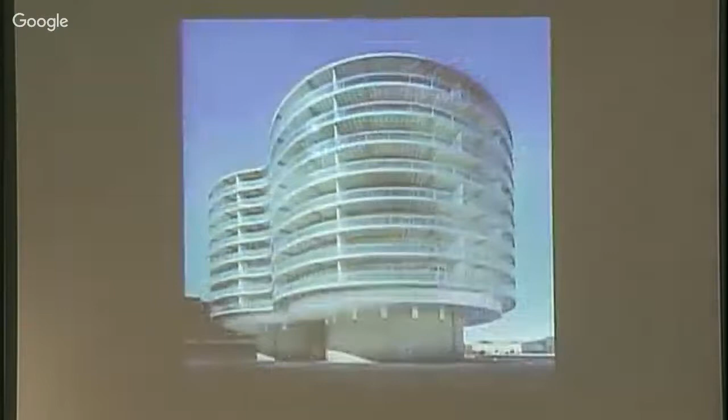In Madrid, we built this social housing project. Again, density with a big public space. And you see, we try these things more often in all kinds of places. But sometimes we also built single family houses.

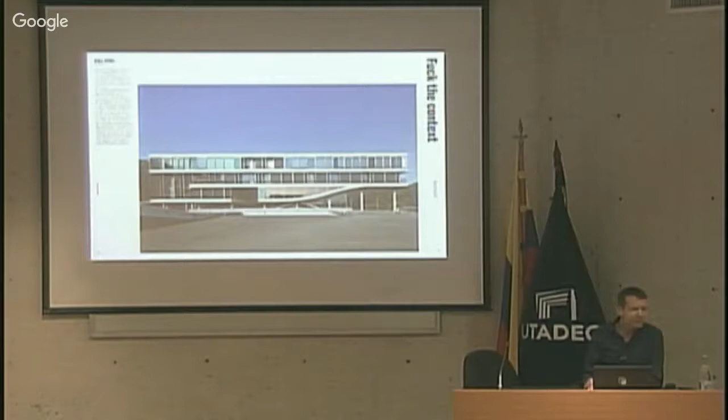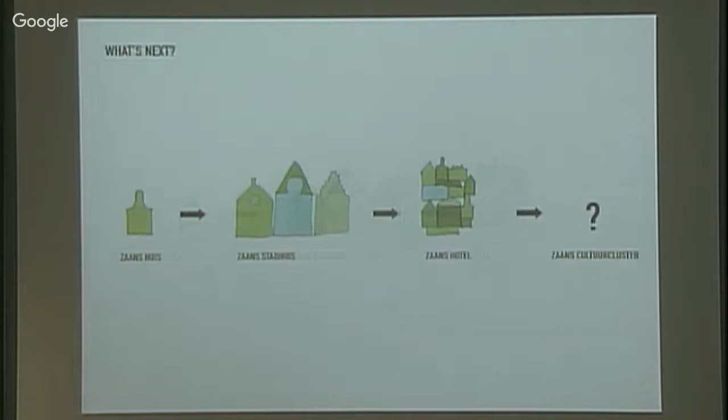To make it even more complex, they wanted to get these 8 cultural centers out of their houses and into this new culture cluster. None of them wanted to go, so we were designing a building for people that didn't want to use it. Also kind of tough. So we thought we should put them all together under one roof, but they should all keep their own identity. How do you do that? And then on top of that, if we wanted to win this competition, we actually had to deal with this Zaans house.

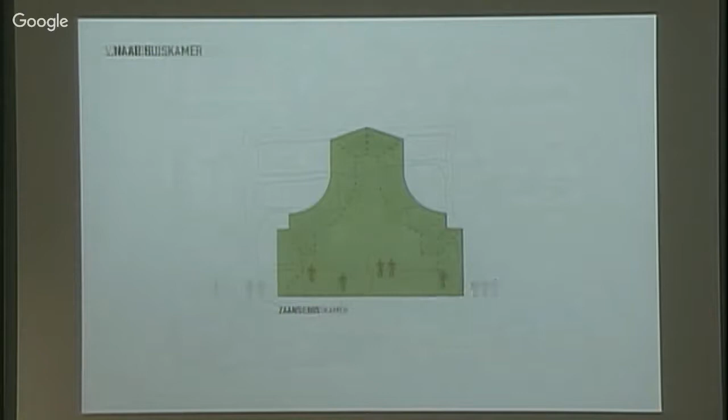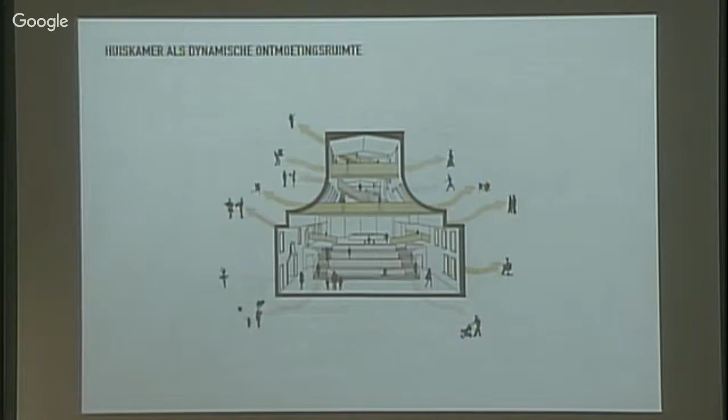So we thought, what if we now use this house and we invert it? Then we have a house, a huiskamer, which is the Dutch word for living room. So a house room. And then we use that as a central atrium and we put all the other program around it. So this is our scheme, and with this scheme we then won the competition. And in a way we also make a difference. We are still modernists, we still have a modernist block in the middle of all this kitsch, and we still incorporate the kitsch. So this is the block.

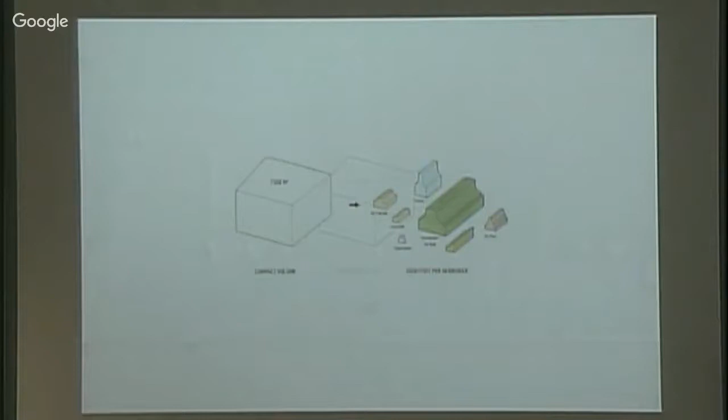These are the voids for all the cultural centers. We then just shove them in. And then what it does is actually that we have the individual expression for each of the culture centers, and also a common ground. In the gray zone, you have all the communal spaces that they can share, and that should take care of some incentive to work together. This is how it looks from above, and then we thought about the materialization.

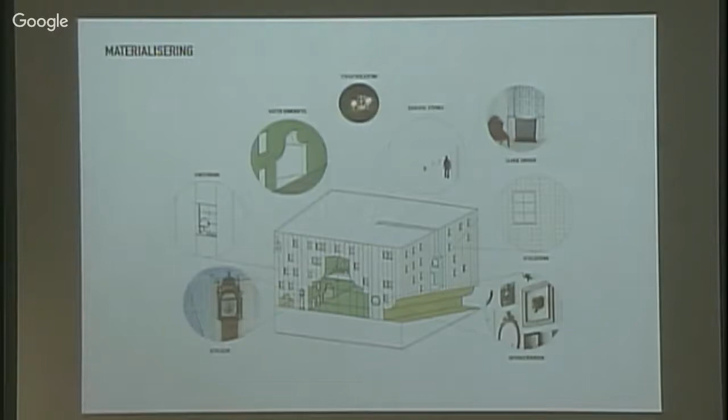In the old houses, you have wood on the outside, and inside you have wallpaper. And we thought, okay, let's just turn it around. Now the wood is on the inside, and the wallpaper with paintings and decorations, and a cuckoo clock is on the outside. So we basically just take one of these Zaans houses and we invert it in a bold move, and this is how it looks then from the inside. You have the inverted house.

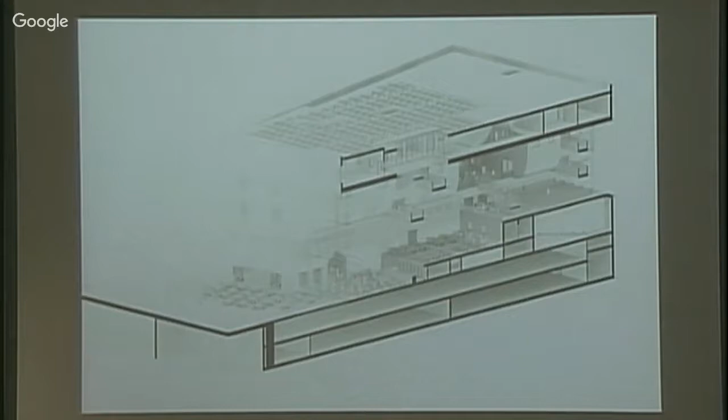And around it, because of this logic and because of these spaces that we directed towards sites in the surrounding, we have a really complex building. And it was kind of difficult to solve it all, but of course, yeah, we managed, and we work in BIM these days, which makes a project like that extremely manageable. And it's now underway, and the city is actually really happy with it, and it's going to be realized.

I want to move to Oslo, and again, Europe. What you can see is that the skyscraper is an American invention that became an Asian typology, and the only thing it actually does, it has an entrance. You go in there, and then you go up and down. And that's more or less what you can do. Of course, there's some exceptions to this rule, but this is basically what it does. So, in our view, it doesn't do anything to the city. So it's a bad citizen, the skyscraper. Yes, in terms of density, it might add something, but in terms of urban life, very little.

What can we do to the skyscraper to make it more European, to give it all the qualities that we like so much about the small scale, the history, and the quirkiness of it? Imagine we built one in Lego, and if we would just change one stone, wow, now we have an entirely different building. We now have a building with an address halfway through. We have an outside platform where you can see the rest of the city, and we have a room underneath that has a view on 3 sides.

So suddenly maybe the boss doesn't want to sit on top anymore, but he wants to sit halfway through in this great office that is floating above the city. What would that do? And maybe the hierarchy in the company becomes nicer, because now more people could use the top floor.

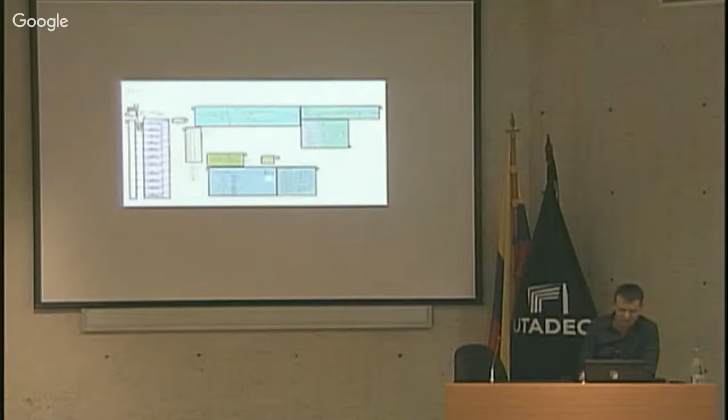Now we would change many more of these parameters and make it more open, more light, more outside spaces, and we do that then in these crazy things, and in the end we come up with a design. And the design then looks, for example, like this. Now this is what we call a European skyscraper.

It has the same quality to us as an Italian mountain village, because you can see your neighbors, you have outside spaces, you can grow trees. Maybe there's an apple tree, and you can harvest your own fruit.

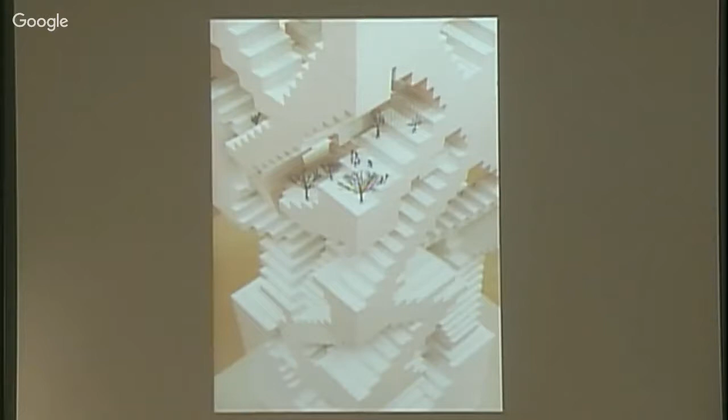We needed a lot of Lego to make them, and so Lego was friendly enough to send us 1 million white stones. And so we built a few of these towers, and then we wanted to build more towers and make them taller, but the University of Delft said no, because out of health and safety reasons, they were scared that one of the towers would collapse and kill a student, which is basically really bad PR.

So we asked Lego for some more. They sent us 1 million extra stones. So now in total we are a proud owner of 2 million Lego stones, and then we could work on more varieties for the European skyscraper. The students made so many of them, and you see them, and then they built them in Lego. And in long workshops, they discussed all of them.

So now, if you want to build a European skyscraper in Bogota, why don't you just give me a call and we'll send you one of these Lego models and you're done. You're going to have a nice skyscraper, I promise you. It's a good one. And look at the choice you have.

And sometimes we then have a big mouth, and we have to also realize these things. When the largest bank of Norway wanted a new headquarters in Oslo, they asked us to do it. And for them, it was an operation. They wanted to put 17 different offices together. Many different logos, many different brands, marketing people from the bank, bankers from all these different brands. They had to suddenly work together. Human resources people from 17 offices had to come together into one.

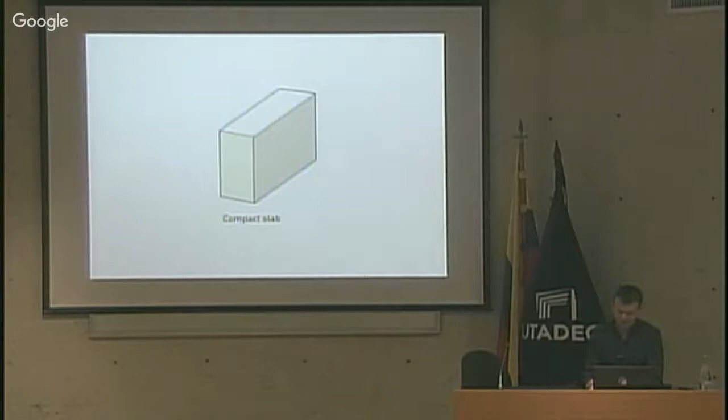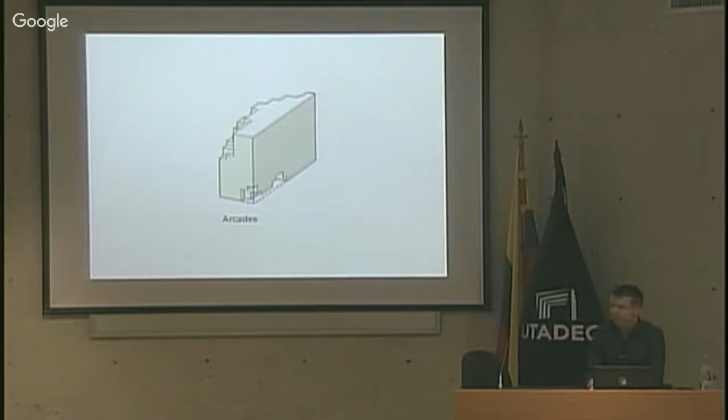So we started with a slab. We made some room for sightlines, because on one side is a fjord, on the other side the mountains. We put a passageway right through, an arcade towards the entrance. There's a lot of rain in Oslo. We slope it to the south for great views. And then we add spaces, because Norwegian people think it's really important to go outside once an hour.

And then we spread the special program of the headquarters all over the volume, so that you suddenly have different addresses in different places. And then there's an interior route. You can go from the ground level up to the 17th floor on one side, and on the other side you can walk down again. And then in order to make it visible, we used glass to show this, and this is how you can actually walk up and down through a bank.

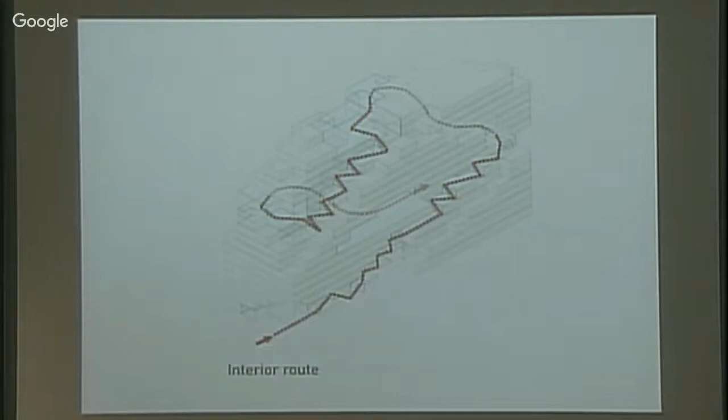Now tell me one bank in the world where you can actually walk all the way up and all the way down through all the different departments. Now this is pretty new. We had to find a way to make this somehow affordable, so we based the entire building on a pixel of 6 by 6 meters, which is the ideal working group of the bank, 4 people.

The bank wanted really boring interiors, standard offices. Nobody had his own desk, so it's a flex desk policy. If you leave your desk for only half an hour, you have to take everything with you. You get a little locker, and you're not allowed to use paper. So they wanted an absolutely neutral working environment, highly sterile. Wouldn't have been our choice, but they asked for it.

But the moment that you want to take a coffee in this bank, you need to leave this neutral environment, and you have to go out of this department. You need your swipe card, and then you end up in this public walkway. And there you have a kitchen. So 17 kitchens on one side, 17 kitchens on the other side was the idea. In the end, it became a bit less, but this is basically how the bank works. And when you then take a glass of water, you suddenly see colleagues from other departments walk up and down.

And it actually happens a lot. And here you see how this works. So you have all these stairs going up to the main lobby, and then you go down and you see how your colleagues work. And this is how basically the spine of the bank functions. And here you have the interior walkway.

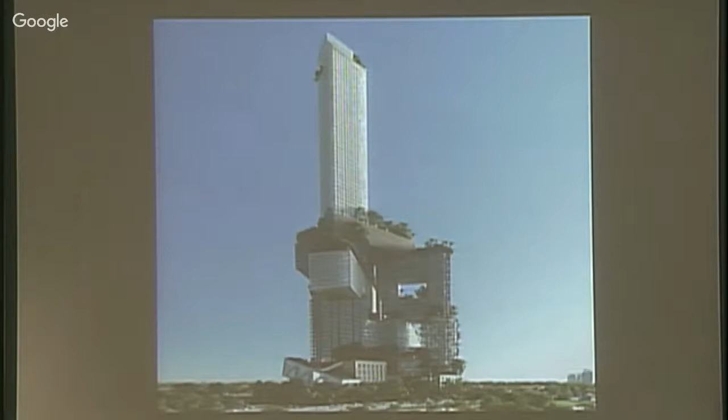Maybe that could be interesting for you too, because you have really beautiful villages here around the mountains. Maybe you should preserve them, because the Dutch people thought that this was a slum. I can see that there's a certain beauty in those mountain sites.

Then in the 1970s, they built social democratic housing. In the 1980s, they built cute housing. And in the 1990s, it became rational again. And in the meantime, Spijkenisse kept growing and became one of the 40 largest towns in the Netherlands. And they compare themselves in an annual competition.

And Spijkenisse had the worst statistics in terms of culture, intelligence, and reading. So 8% of the population of Spijkenisse are not able to read, which for the Netherlands is like a catastrophe. It's just unbelievably stupid. And this in a town that was governed for 40 years by the Social Democratic Party, who has as an ideal to actually enlighten the working class, and they didn't do it. So lots of them can't read.

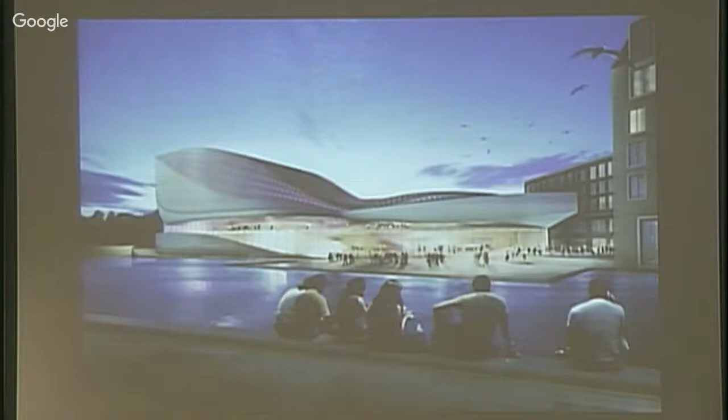Then they built 3 squares, a market square, an entertainment square with this flashy new theater by UNStudio. And the last square was the square of intelligence and philosophy. And that was supposed to be our project. Oh yeah, I forgot about this one. This is the most famous inhabitant of Spijkenisse. It's DJ Afrojack. And for a while he was dating Paris Hilton, and they actually visited the place.

Now, how do you build a library for Spijkenisse? We were invited to a competition, and first we thought more traditionally about what a library should be like. Should it be a really important public building? Yes. Should it look like a machine for reading? Perhaps. Or should it look like an office building like the new library in Amsterdam? Should we make it look like a shopping center like the library in Almere? The interior hardly ever has books.

Should we go for the Mussolini style of the new library in Stuttgart? Or should we make it the living room of the city, like the new library in Seattle by Rem Koolhaas? Well, we couldn't really decide. We didn't have an idea. And so we started to think about what Spijkenisse is all about. It's about people who watch television and don't read. So how do we surprise them to read the book? What we really needed, we thought, was an advertisement for the book.

So this guy watches television, but from time to time he has to walk out there with his dog. So he walks with his dog, and suddenly he wonders, hey, what's that? A mountain of books. And yeah, we like to climb mountains, so he climbs the mountain, and in the meantime he's manipulated. And so ideally this is how the story ends. The television is broken, and they're hooked to reading. Even the dog reads now.

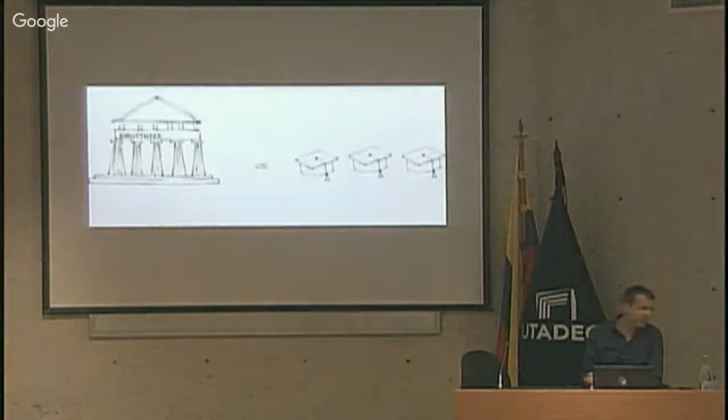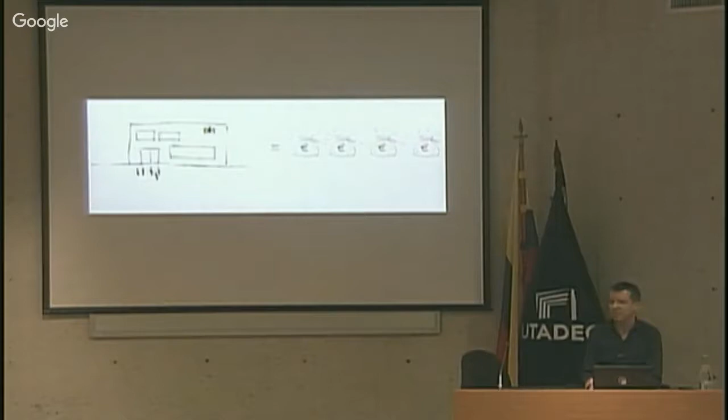So here you see the Center for the Arts of Spijkenisse, which is also an Apple shop. The entrance to the art section looks like this. It's really inspiring, no? You really want to go in there. So basically, this is how the building looks. It doesn't do a lot for the intelligence, because if you ask people in Spijkenisse, where is your Center for the Arts, they have to think about it. If you ask them, where's the Apple shop? Oh yeah, it's there. So they all know. So we had to deal with this.

And on top of that, we had a lot of other programs. So we had a supermarket, we had offices to rent out, we had offices for the library, and we had a film house, and a chess club, and a bridge club. All this put into this building. And then we thought, okay, let's just put all the dirt together, put it into a pyramid of trash, and then we have a nice basis for the library. And we just put that on top.

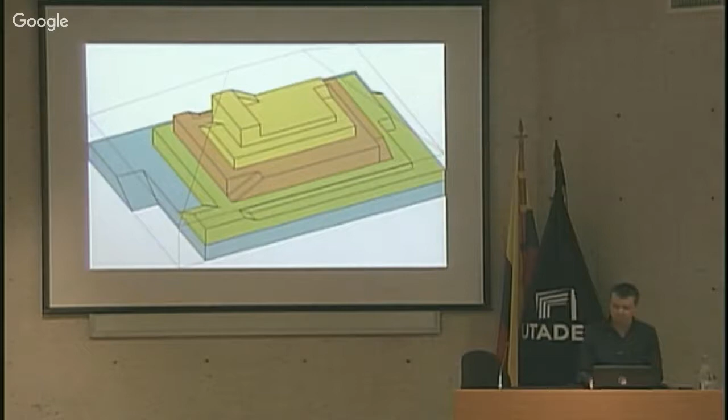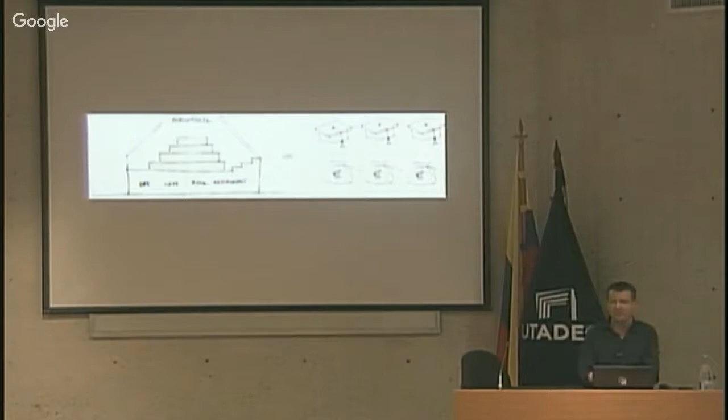And the diagram then reads like this. You have a big public building, which is a bit like Potemkin, like a coconut. On the outside, you have the library. On the inside, you have all the stuff that the city also wanted. And this is how we conceived the book mountain. And here you see the pyramid at work. And of course, it needed to be visible, so we put it into this hood. Here you see it from the outside.

We also needed to solve this wish for traditionalism. We had to connect old and new. Here you see the site. It's next to the old church and next to the last historical street of Spijkenisse. Here we had to build. So how do you connect all this together?

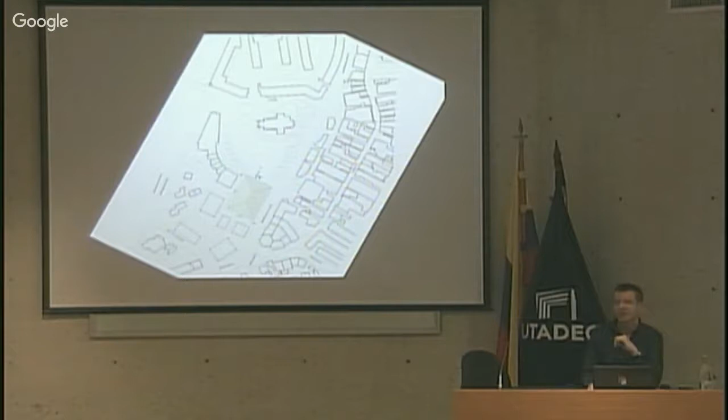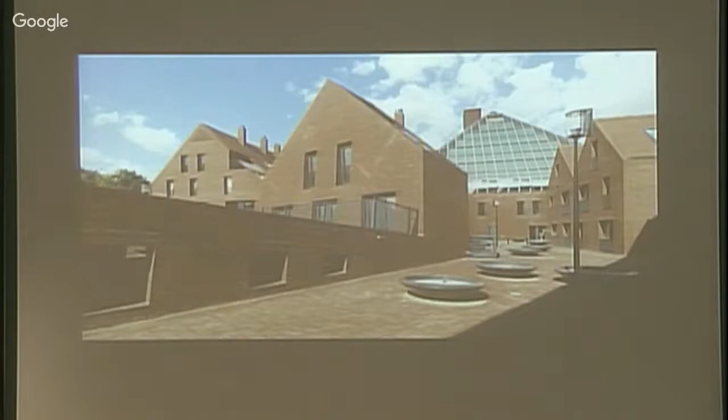And one of our architects went totally crazy with this concept, and he even covered the doors, and he covered the ceilings, and he drew every single brick in a totally obsessive way. And he's a nice guy. We sometimes visit him in the mental institution that he lives in now.

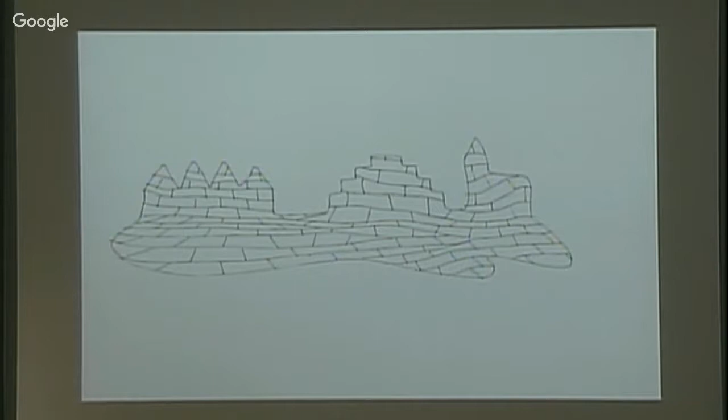So here you see the brick thing. And so also in terms of communication, it was really important that the town is brick, and then on top of this brick, boom, you have the library. And this is the mountain. And then, so this is the design that we had, and we have to protect it from Dutch weather.

And at that time, this exhibition in Switzerland was hot. And Winy, my colleague, he said, yeah, well, maybe we can have a cloud above it, a cloud of gas, and that would protect the books. And then the city councillor got really upset and said, go away and come up with something better. And then we came up with this thing to make it look like one of these things you can shake with snow. But it wasn't allowed. The city remembered that they had a maximum volume, and they said, yeah, it can't be bigger than the church, and you have to make it with a traditional roof.

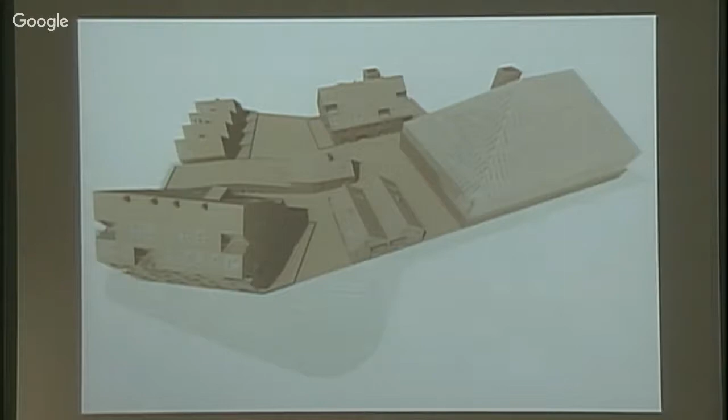So basically this is how it looked, and then we kind of made peace with that because it looks like a big farm, which refers to the agricultural past of the place. And we also could solve the hood, the glass hood, in a very economic way, because we could just use local wood in an old construction method, and this is then used to support the glass structure. So this is all carrying the load, and it works very well.

Of course, a glass building for a library. I mean, this library hardly has glass. And why is that? Because you want to protect your books from the UV light so that they don't deteriorate, and that it doesn't get hot. So in terms of sustainability, we had a problem, and maybe in terms of books that would age, we had a problem. Now the books, there was no problem at all, because the books are given to the people, and they are brought home. People read them at home, they destroy them.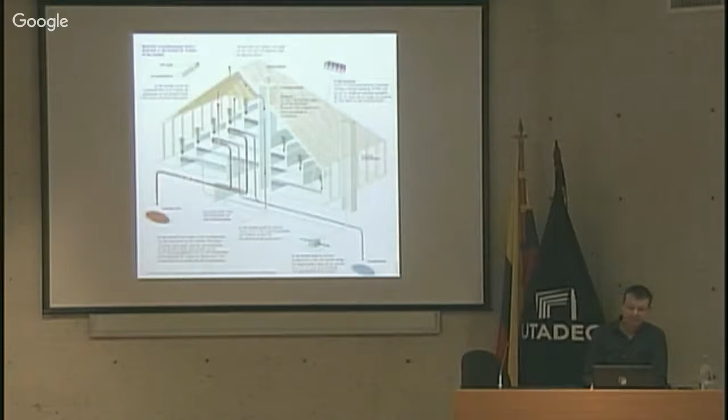So we have these pipes right near the glass. You see them there. They're the sprinkler installation, but they are also the heating and the cooling. So in summer we pump cold water through it, which is then heated up by the sun. And this warm water we then store in the ground. And in winter we use it to heat the building.

And so by using this and many, many other passive technologies, including the plant you see, a Brazilian fig tree that helps to air condition the building, we were actually able to make it highly energy efficient. It only consumes a little bit of electricity, so it's really good for a public building. It has an amazing energetic value.

Then there's the psychology of the mountain. Of course, we want people to climb the mountain. You have mountains here. I'm sure you climb them, but in the Netherlands, we don't have them. And so we thought this trick might work. People build weird buildings just to go on top. If you don't have mountains, you have to make these crazy things to get people up. So we thought in Spijkenisse this might work, and it actually does.

So in order to get people fit, we made these wide stairs, a bit like here in the library, same trick. You have a nice big inviting stair and the elevator is a bit hidden, hoping that you would then use the stair. And on your way up to the top, you are continuously surrounded by books on both sides. And even though the library is much smaller than the library they had before, it has a lot of ceiling height, so it never feels claustrophobic. And then on top there's a cafe and you can relax from all the mountain climbing. It now works very well.

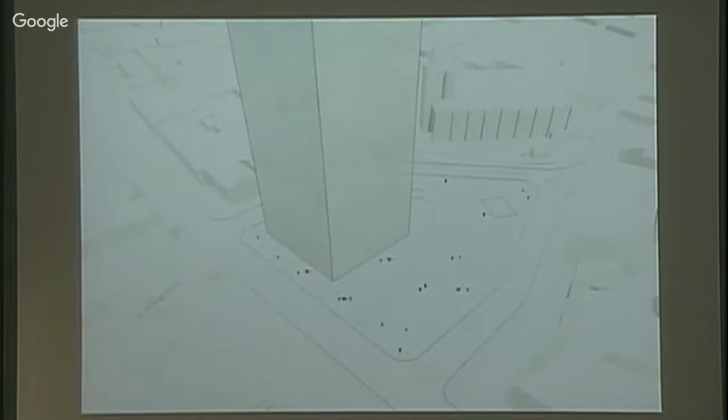They said, well, why don't you just build a skyscraper, 300 meters, and the entire country will know you. No, this is a joke, huh? You can't be serious. So we designed them 7 different buildings, and they all refused them. There was always one political party that said no, and the city councillor had to go. And in the end, they decided to put all the parties together on one table. And in 8 weeks of work, they finally decided that this could come.

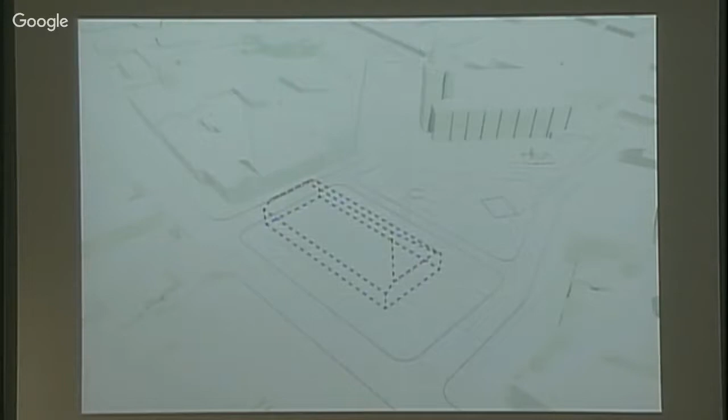This is the maximum volume. Great. Problem was for us that it looks like a local farm. So it was a Freudian move. So what they lost, they want to have back. We see all the farms, and we said, okay, why not we just give them a farm? So we started to analyze the farms in SketchUp. We put all the farms that are left, 80 of them, into SketchUp, and we started to analyze them.

And then we made an average calculation. And then in the end, we ended up with what is the average Schijndel farm. And then we put it on the side, and then we had a problem. It was too small. But hey, thanks to BIM and Photoshop, we can just make it bigger.

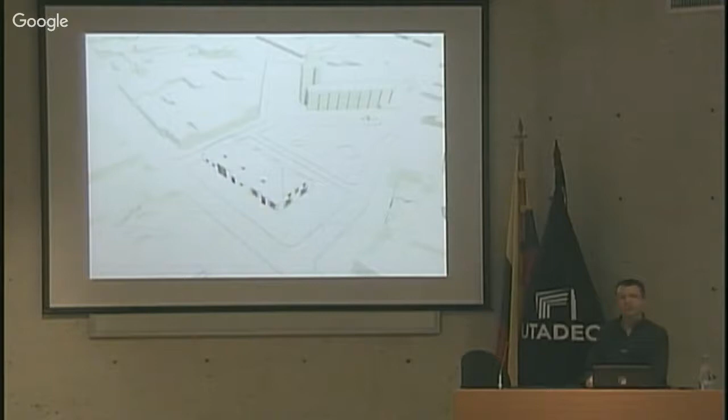And then they said, okay, how do you materialize it? Because we want traditional materials. We want brick, wood, thatch. No, we didn't want that. Because it looks like a farm, but it is not a farm, it's just a shopping center. So what about glass? Glass, yeah, a farm has glass, great. So we found a way to print farms on glass in a new method.

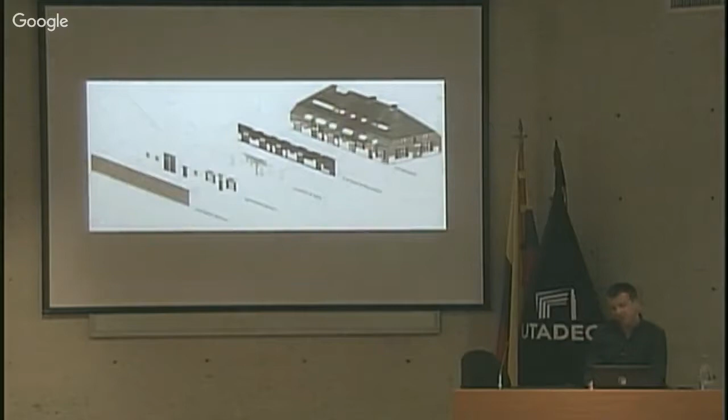And so basically the glass building, inside it's really shit, there was no money for architecture, but we have a 2 millimeter architecture, basically, which is this glass. And the print was done, and then from time to time there were real windows, so we had to erase the print. So we start with the brick, then with the windows. We also engaged an artist, so he added some stuff like the shadow of a tree that isn't there. And then we have the transparencies, and this is how it then looks like.

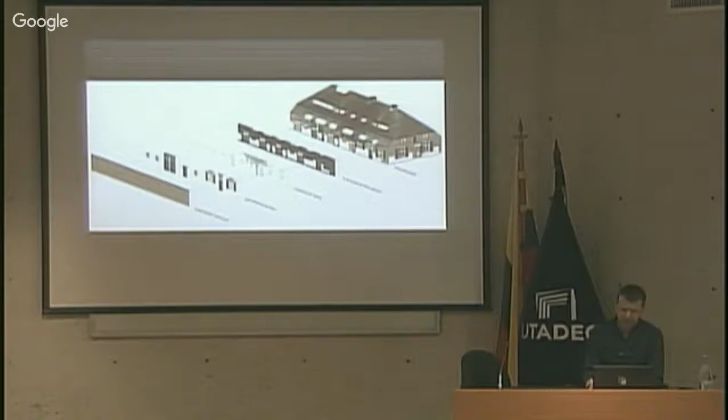And it became a tourist attraction, and the people of Schijndel were really proud of it, which is good because the parents really still live there, and they were attacked during the construction continuously that this monstrosity was built in the town center. But then later on, they were walking with this rollator, the Zimmer frame, very proudly, and said it's great. Yeah, everybody loves it, and this is how it then basically looks.

The farm is made out of 1,008 panels. They're all numbered. You see it here. So if one of them breaks, it can just be sent back to the factory for a new print. From the inside, you see the farm, which is a really strange view. You see it here in the kitchen, and if the guy washes his hands, he sees the farm. And then you have these windows. You see the ugliness of Schijndel outside, which then fades into this beautiful brick motif.

From inside the shops, you have these strange moments, and even the shop windows, they look like this. This is the ice salon, and here you have the yoga parlor. So, however bad they furnish it, it doesn't really hurt the building because the glass is so strong in that sense.

Yeah, and then they were pretty happy, especially when the BBC visited this small village in Schijndel, and there was never a TV crew, not even a Dutch TV crew in there, so for them it was extreme. And we did that not with a museum or with a big public building or with millions of budget, we just did it with a small series of shops.

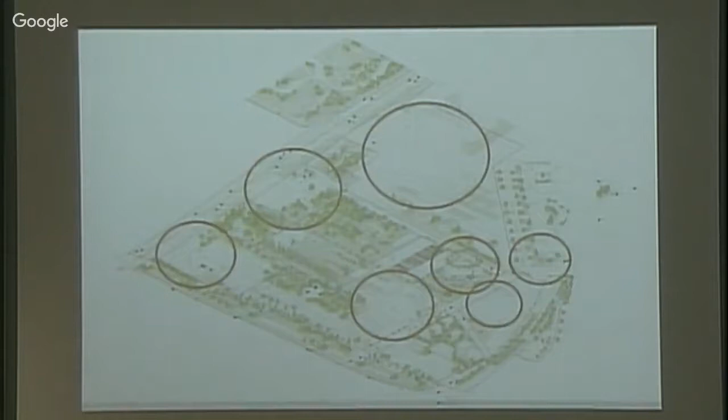But there was the competition site. Again, we had to compete. All around, you had a big hospital and lots of cultural institutions. A very central spot in Rotterdam. Here's our site. We had to preserve a walking route for pedestrians.

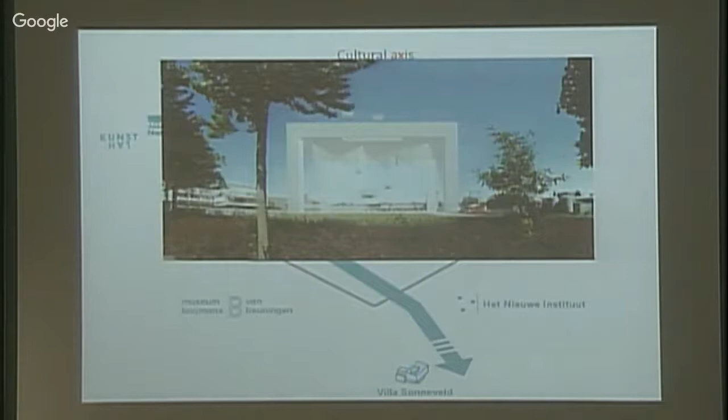Our first idea was to make a museum that is really safe from water. We have a table with a sculpture garden on top. So everybody sees that the 7 billion euro worth art collection is secure. Even if there is a flood, nothing can happen. But we found out that the budget of the museum was just good enough to pay for the steel, but not have it delivered. So that was a problem.

Then we tried with the most boring shape ever, the block, and even that was too expensive. It had too much facade, so we couldn't use the block. And then we were in crisis because how can we solve this? The budget was basically too low for this building. And then one of us found this solution to make it round, because then suddenly you have less facade. And then we make it even smaller on the bottom so that less of the park is destroyed.

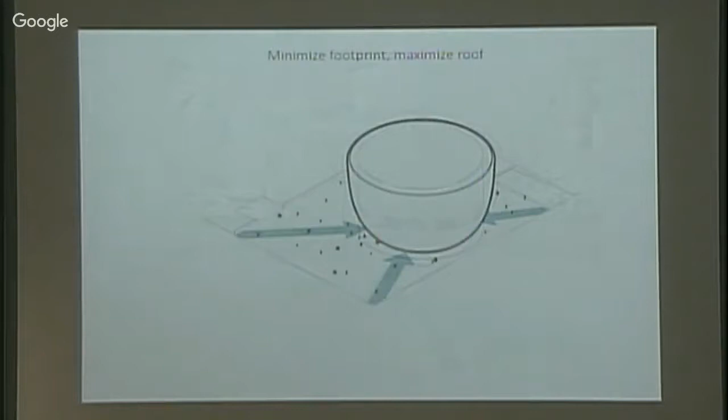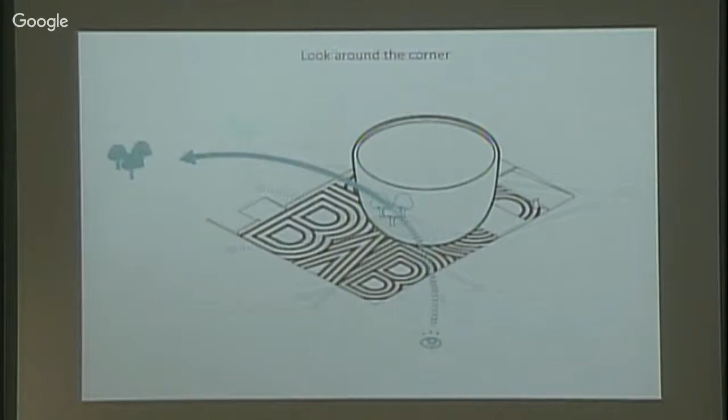And on top, we would add a terrace so that people can overlook the surroundings. This round volume made it possible that you preserve the view lines. But still, you're building a monstrous, a whopper of a building in a park. So how can we dematerialize it? And then we thought, oh, let's make it a big mirror object like that bean in Chicago. So then suddenly the building will reflect the park, and you can even look around the corner if you see it. And towards the top, the building will just disappear.

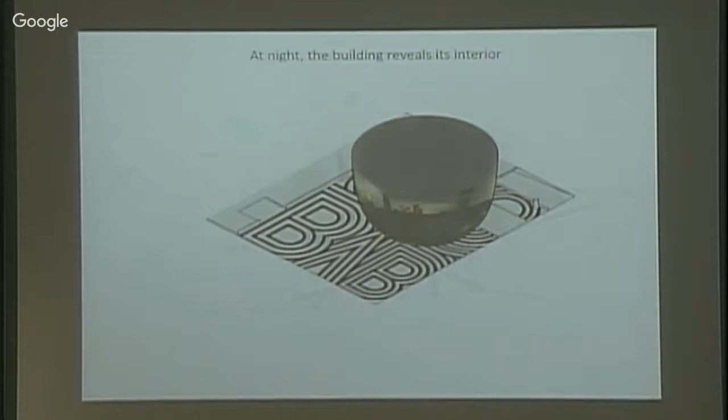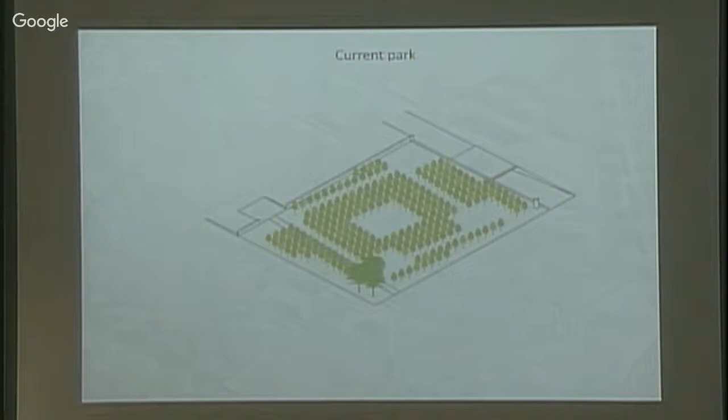And at night, the few windows that you have that are hidden within the glass come out. So this is how it looks then. During day, you see the city, and in the evening or with bad weather, then you see how the windows materialize. So this is how we imagined it, and yeah, all the trees that had to be removed. We thought, well, why don't we just dig them out and put them on the roof? In the end, that was possible. We got $1 million extra funding, and we basically made this happen.

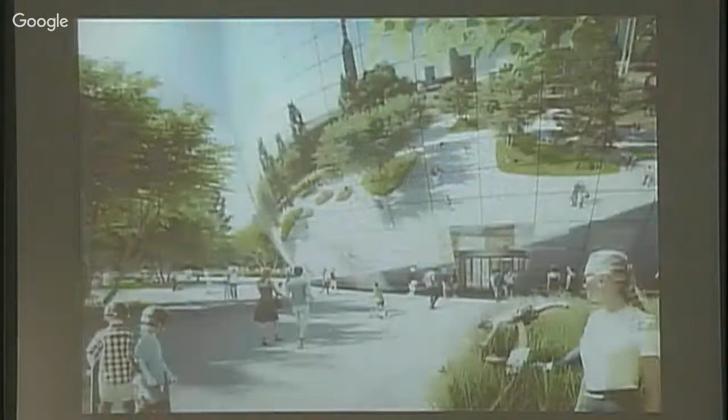So this is how you're going to approach the building. The entrance is there, hidden. You see the trees on the roof. This is how it sits. The ground floor is half for the lobby and half for distribution. They need to put really big trucks inside because of safety. And then you can take the elevator and go into the archive. And there's a big atrium that goes all through the building, and it is covered with artifacts. You see it goes all the way up, and this is how it's going to look like.

Museums in the Netherlands are really expensive, they cost €10, and not everybody can afford it. If you have a family, €40, it's the price of a meal. So we thought, how can we make it accessible even for people who can't pay the entrance? Well, why don't we just take an elevator, which is free, all the way up to the roof, which is free, through this space. So you can at least see the space while you go up there.

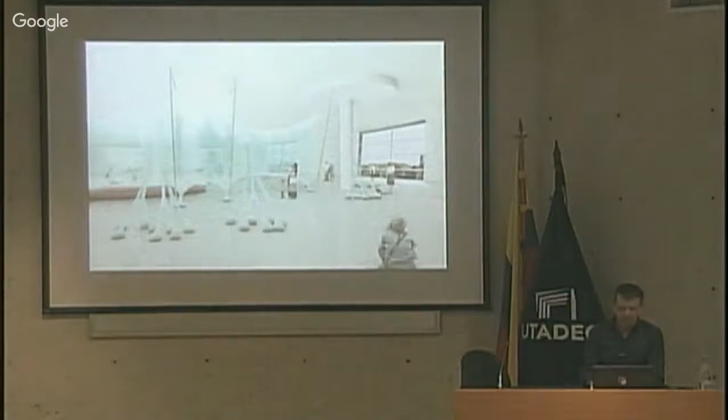And then we thought for the evenings that we would make a lighting plan that would highlight some of the better artworks there. And you can freely move around there in cages. You can touch the stuff that's not so expensive, and the more expensive stuff you can then see in these guided tours that you can book as part of the visit. You can see how they are preparing the art for launch, have temporary exhibitions, restoration workshops, weird art projects as they come. And then on the roof you have this restaurant that everybody can visit with a mirrored ceiling so that you can see the art, and there will be a garden.

I'm almost at the end. Crystal Houses is a building. I missed the opening because I'm in Bogota. It was opened on Tuesday. It's in this street in Amsterdam, which used to be a residential road. It's called the PC Hooftstraat. And in the 1960s, it slowly started to turn into a shopping street.

And now it is the one and only chic upmarket shopping street in the Netherlands, the one place where you have Gucci, Prada, Chanel stores. You know, the Netherlands are by definition a sober Protestant country, so we don't really need these shops. But since Amsterdam built 4 new museums, we have so many tourists that they all occupy these shops.

Suddenly they need them. Before that, the street was really bad taste and only footballers would shop there. But since the museums have come, entire masses come there. Now the city of Amsterdam had a problem because these residential buildings, they are not flagship stores. They don't provide enough space.

So how do you keep Chanel, Prada and all these other brands happy? Because this is what they want. They want these shiny palaces like the Gucci house here. But they can't realize them without destroying the historical substance of the city. And you see here that it was about these two white buildings, formerly residential, and now with a really ugly facade for the shop underneath.

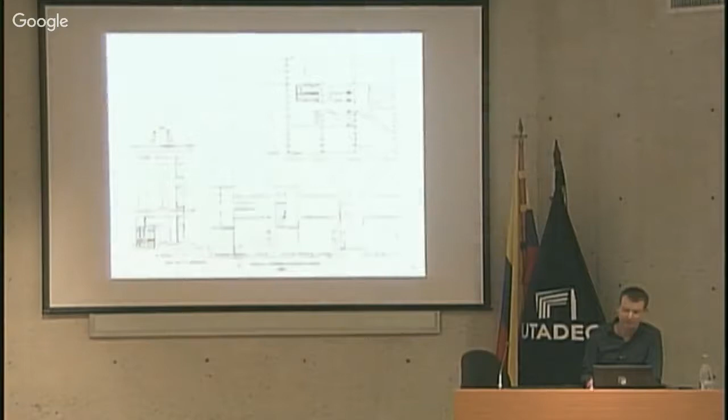So first we went into the archive to look, how did they look before? It was actually three brothers. They all look the same, built in 1874. And then they were changed into shops. Our client asked another architect initially to redesign them, and he came up with this thing. And our client would have made a lot of money and saved a lot of money, but he wasn't happy with it.

And then he came to us and said, look, this is not really doing it for me, and I feel like committing a crime against the city if I would build this. The city already said yes to this, but we can't do it. And we said, why don't we just use these old buildings and we stretch them? We use the old facade and we make it bigger, so you get this weird upscaled thing.

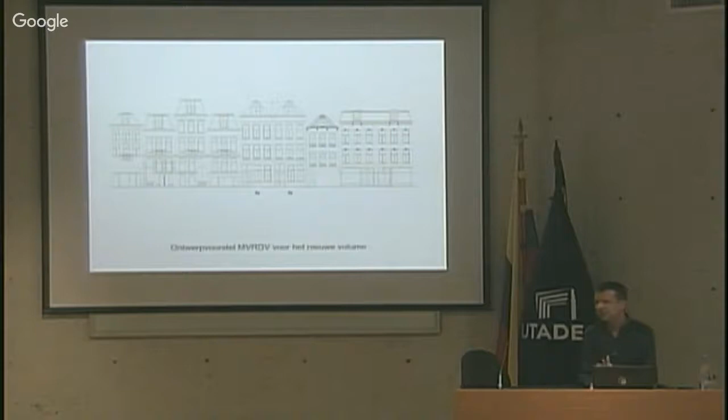And then he said, yeah, okay, but we don't have big windows here. He said, yeah, but what about that? You have the empty side with a nice view to the park behind, and then you just fill it with glass. That's all you do. Oh, how do you do that? Oh, you use glass bricks. We had no idea whether that was possible. Sometimes you bluff to your client, you tell him it's no problem. Okay.

And this is how it would look like. So you would have these beautiful glass buildings and every detail would be made out of glass. Isn't that great? And to our great shock, the client loved it. And he said, let's do it. Okay, so we went with the plan to the city of Amsterdam, and the city of Amsterdam said, no, can't do it. This is really not the tradition here. You need housing behind brick, and we have a rule that you have to use brick. We have a rule for roof tiles and all these things. This would destroy the historic substance.

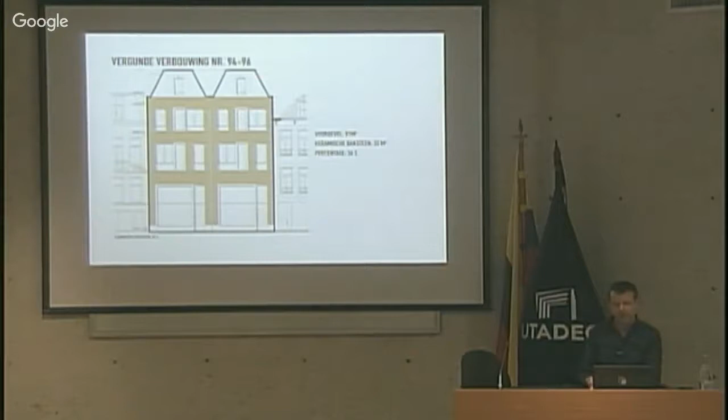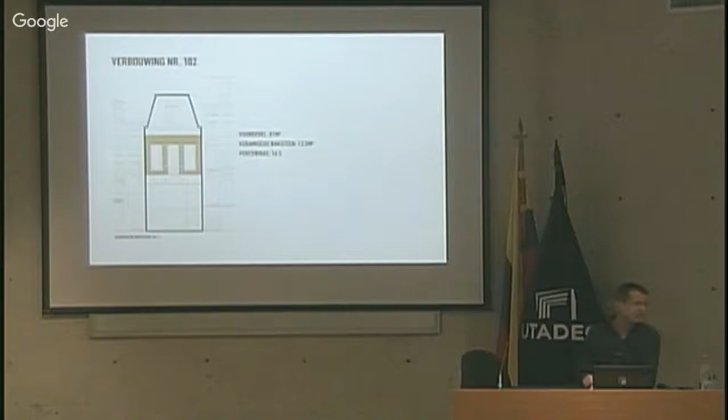So what we did is we looked at the buildings that they already had agreed to build. So here we counted a percentage of 36% brick. Here we counted a percentage of 16% brick, and then we calculated that the average amount of brick in the facades in the surroundings was 20%. So we said, okay, let's do it. We remove these buildings, we replace them with the bigger version in glass, and we make them brick, and then we reduce the brick to only 20%. So this is how we did it. Glass, brick, 20%. And this is how we managed to get a building permit.

And this was the design. And now all we had to do is realize it. And the client started to build the new buildings all around it. And at a certain moment, they were done, except for this nine meters of glass facade. In the meantime, we tried to make it happen, and we tried plexiglass and all kinds of other things. We also for a moment thought of just printing it like in the glass farm, but nothing really worked.

So thank God we went to Venice, to Murano, to see this glass factory where they could make glass bricks really precisely with hardly any mistakes, so less than one millimeter of tolerance for the material. But then we had to find a way to stick them together, because glass doesn't stick with cement, and we wanted to have a glass facade and not a glass facade which has these ugly cement lines.

So what did we find out? That orthodontal glue was the best, actually. It's a glue that's extremely resistant. They use it in your mouth a lot, so it can stand pressure. And first you apply it, then you glue it, and then you use UV light. So if there's sun on the glass facade, this facade gets better.

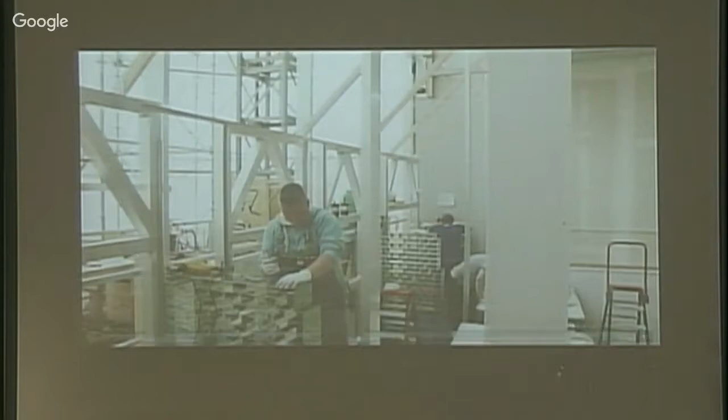Now then we had to build it, and it was the cleanest construction site in the city, because it had to be absolutely dust-free, because we couldn't have dust in the glue. And I want to show you this video, how this actually worked. Yeah, in the office we call it the glass porn.

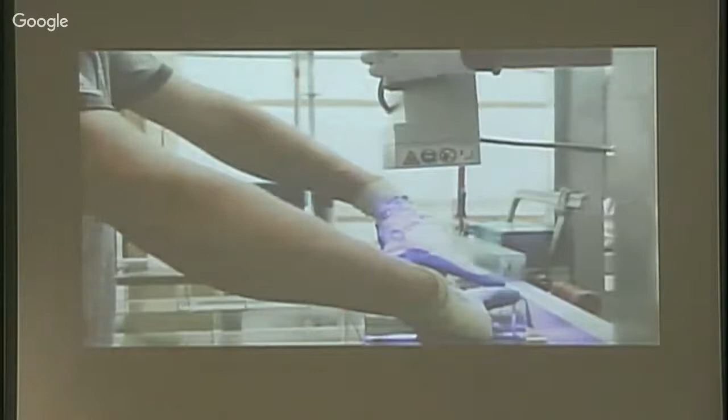I think it took half an hour for each brick. So for a few months they had to actually build this. Put the glue into a mold. Now then they put the UV light on it. So you have slow food, but this was really slow architecture. It's the slowest construction site ever.

And extremely clean, and you see the numbers on the bricks, they were all numbered, so it was like a big mosaic as well on top of that. But also really good, because bricks that broke could just be replaced, and you could use the material again. So one day, if this building is demolished, hopefully not so fast, they can just basically recycle the facade. Right, this will continue for a while, so I spare this to you.

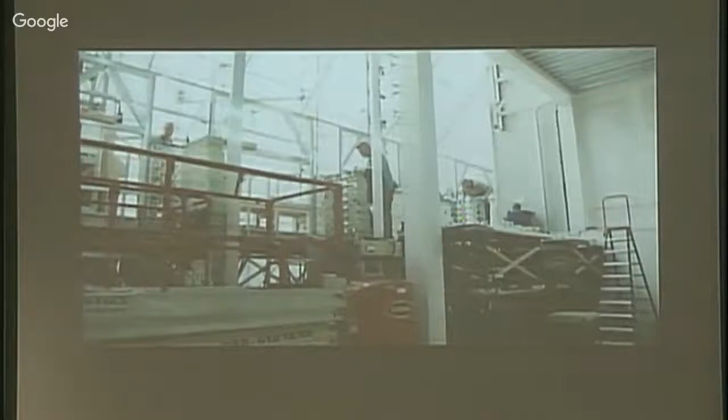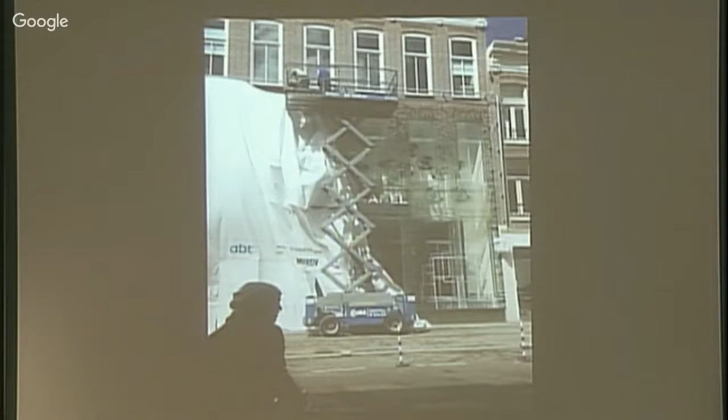The most difficult detail was actually this, where it fades out into the real brick, because then we had to use some kind of cement, and so we hit the bricks with glass so they can stick together. Last Monday, it was finally taken out of the plastic, and people could look at it. On Tuesday, Chanel opened its doors. It was not designed for Chanel. They are very particular about it, because they will only occupy it for 1.5 years, and then they will move into one of their corporate identity shops, and some new brand will move in here.

And this is how it looks in daylight. You see all the beautiful details. The glass was extremely expensive, because normally glass is green, and we asked for a glass that had as little green as possible. And still you see that because it's so massive and such a big amount of glass, it has a slight touch of green in there.

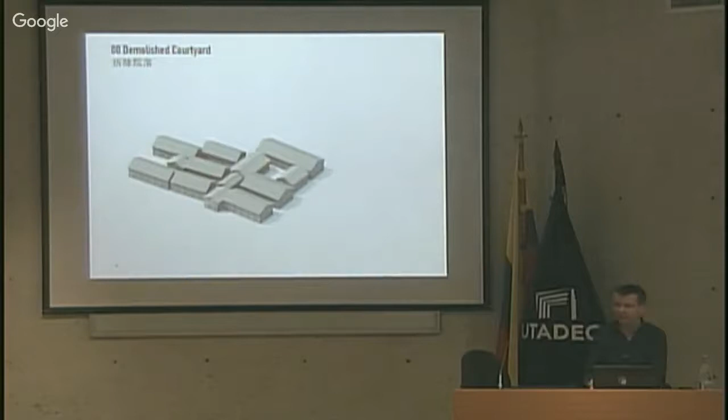And this is how it then looks like. In the meantime, the street has gone bigger, so we have to cut it, which is pretty good for our little plan. And then we use these wood structures to cast concrete over them. Just pour it all over, plop. And then we put circulation in, we cover it with the floor and add a glass facade and put a roof in, openings, and this is the end result.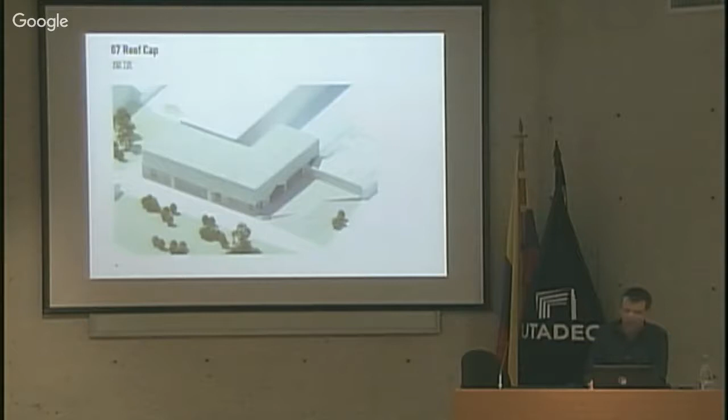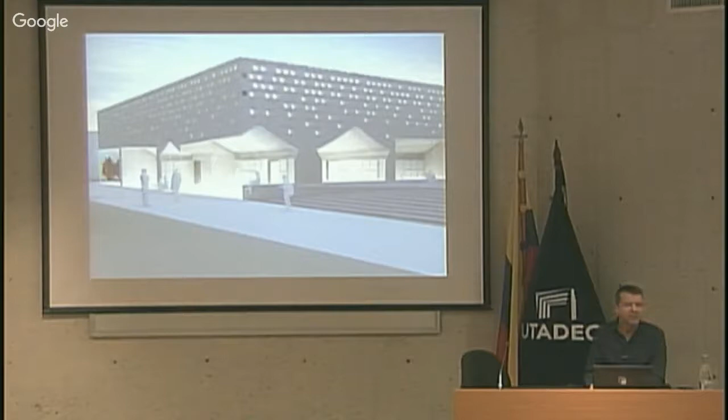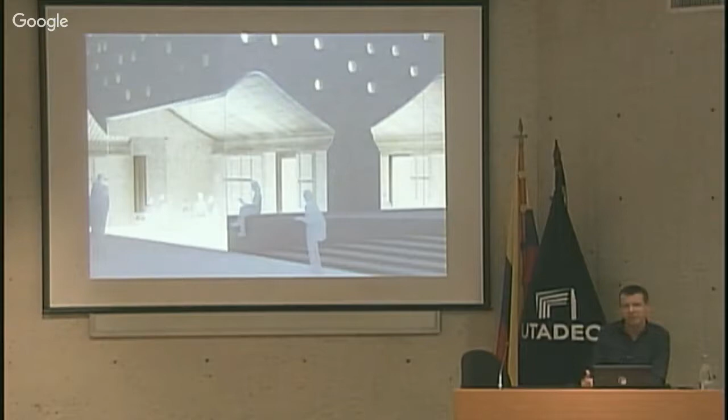And now suddenly you still have the historical buildings. They're somehow preserved, but they're modern. So you still have the old, you can see all the details in the interior, you can see them through the glass, and yet there is a modern architecture in there. And in a way, it's a monument for what was left. It monumentalizes what has disappeared, and it doesn't just bring it back in a nostalgic way, but perhaps in a more contemporary way.

Okay, now I promise this is the last. This is the historical city center of Rotterdam, and it used to be a really beautiful city, and then in May 1940, Hitler tested his new army, and he wiped out the place. And this is basically what was left. You see here our site.

Rotterdam city center also had the problem that only 20,000 people lived there for an agglomeration of 1 million. So the city has a very active program to get apartments back in. So they said in this one area, you need to have a public market which is covered so that people will come there every day, and you also need new apartments.

So this is when they came up with the project developers competition, and we were called by this really traditional project developer from The Hague called Provast. In that time they were residing in a palace in The Hague, and now they moved to a modern building. And they asked us, because we were a young office from Rotterdam, they didn't know the city, and so we got the commission to enter this competition together.

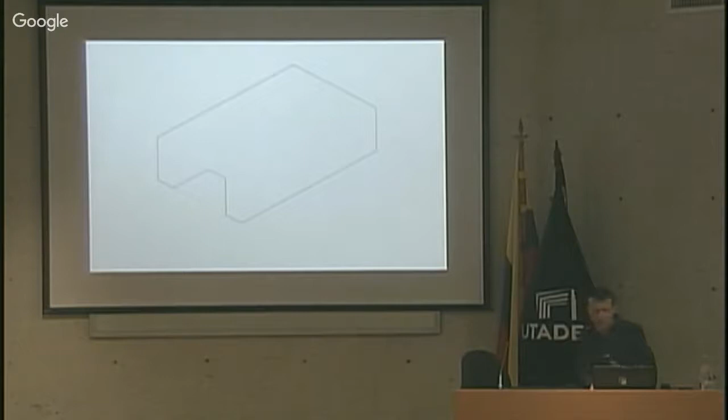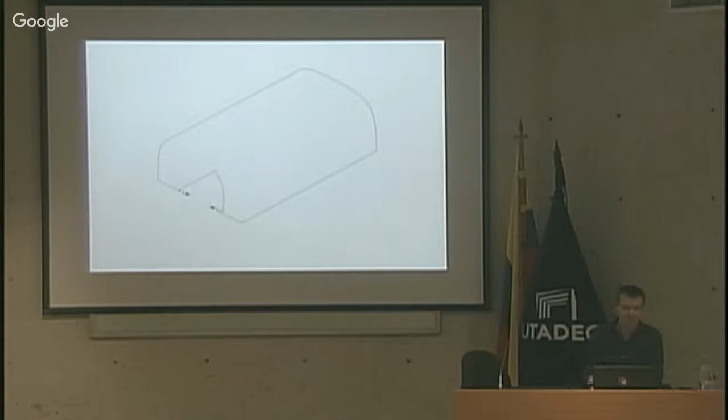They first said, yeah, that's good, we can do it, but the apartments don't have enough sun, so let's make maybe a Roman arch. Problematic, where shall I leave my elevator? Here. That's how we redesigned the shape a bit. Then they said, well, most money in this building will be earned on the ground floor, so you have to make the ground floor bigger. Can you not make this building look like an omega sign with more on the outside? We said, well, that's not so elegant. But what about this? The market doesn't bring so much money. Why don't we reduce the surface of the market a little bit? And so therefore we went inwards. And this is how Market Hall came to life.

So here you see how it was constructed. It's also a very long story because we constructed in soil that was as stable as custard. But basically two flats that can stand alone and only one layer of penthouses on top that had to be the bridge. The shape is so totally rational. It's not a crazy architect's idea. This is basically shaped by financial conditions and logic.

I want to walk through the building with you really fast. You see the ground floor has the market and restaurants and retail, which is only related to food. We have 100 units inside the market. We designed them in a very neutral way so that the market people could come up with their own identity. Here you have a pinchos, a frozen yogurt, a cheese, and French fries. They all have their own identity. A market is not a stylish thing, but it's slightly vulgar, and you have to help to find their own identity. Then we decided to not have a competition inside the market, so you can buy everything cheap, for a middle budget and expensive. So this is the price of chicken, ranging from €3 to €27.

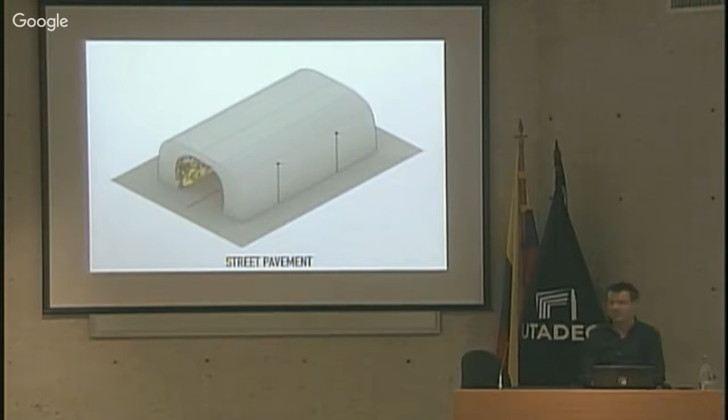We initially won the competition with an art print on the outside, so strawberries over 3 floors. But then the owner of the shopping center asked us to be more sober so that people wouldn't approach the building and only photograph it from the outside, but that they actually had a reason to go inside. So then we wanted to make it more sober, and we just used the street pavement of Rotterdam, which is a beautiful gray granite. And so basically Market Hall is nothing but a fault in the street, in the urban fabric. And then you see how well it works. The colorful print is really coming out. And this is the print. You basically lie on your back in a meadow, you look upwards to the sky, and all the stuff that you can buy on the market is falling down onto you.

The artist, that's him. It's a local artist. He had 3 weeks to realize it. It's a 3D animation. He went to an Office Depot to get a computer, and they told him that there was no computer that could calculate 11,000 square meters of render. So how to deal with this? So he Googled a little bit, and he ended up with a computer in Hollywood, the same farm that rendered Finding Nemo, this Hollywood animation of the orange fish. And this is how they made it.

And then in the last week, before they had to print it on these aluminum panels, the owner of the shopping center came and said, "Oh, you have a lot of insects in there. You know, our consumers are scared of insects. You can't put aggressive insects in there." So they had to commission about what kind of insect could be in there.

And they came up with a few. Butterflies were okay. Then they said, there's another problem. You have pork in there, and Rotterdam is a city with lots of Muslims. You know, the market is for everybody, so you don't have pork in that. Okay, the pork chops got out.

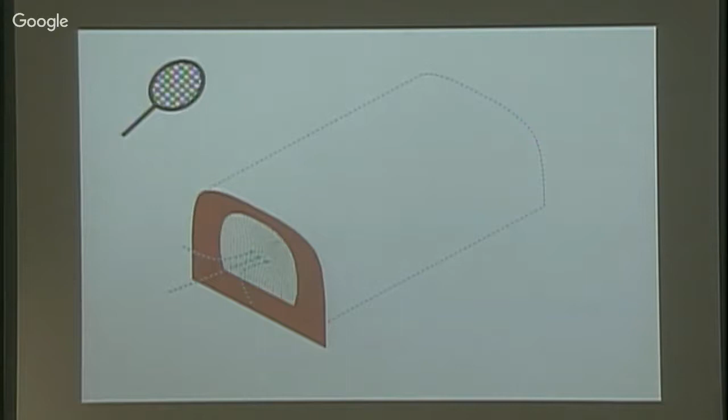So this is what they calculated in a computer model, and he became with this design the engineer of the year. He bought himself a nice new BMW hybrid because it's good for the environment, and often, when it storms, he goes with his hybrid to Markthal and sees whether this thing actually moves, but they forgot to put the buildings that are around Markthal into the computer model, and therefore it will probably never happen.

Now, it also needed to be a sustainable building, and how do you heat and cool such a big space? We decided to just not do it. So the fresh air is coming in underneath. You go into the market hall, it's either cold or hot. The natural ventilation takes care of it because the market is hot, the people are warm, the air goes up in a natural way, and only in summer they have a little bit of mechanical ventilation. In winter they have floor heating to keep the frost out, but that's all.

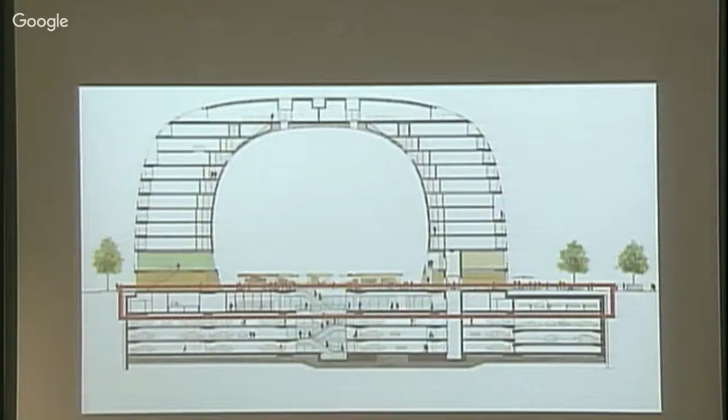With this we were able to reach BREEAM Very Good, which makes it the best performing shopping center in the entire country. And now other shopping centers are also starting to not heat the galleries. I go down to the basement with you. It's really important. We have the delivery platform there. Markthal doesn't have a front side and it doesn't have a back side. You have shop windows on all sides. And that's new and that's good.

But normally a shopping center in a European city has a distribution edge, 40 meters of steel doors, and that doesn't do anything for the urban surroundings. It actually is the place where drunken people start to pee against the facade. So this is something we didn't want, and therefore we invested a lot of money so that the delivery can come into the basement.

We also solved another problem because we have apartments on the second floor, and if at 4 o'clock in the morning they start deliveries there, then the people don't sleep anymore. So in order to have the apartments and the market function well together, we had to do this distribution in the basement. What you also have down there is the food preparation and storage. So at 4 o'clock in the morning, they're yelling there, and the food arrives from Paris, and they're making food.

On the other side, we have a suburban shopping center, small supermarket, a wine store, and we thought this was really important to have because we thought Rotterdam people have no food culture, so basically we need a supermarket in order to attract enough people. The supermarket has a tunnel for the expedition, which comes out in the square because they are the only ones who come with bigger trucks.

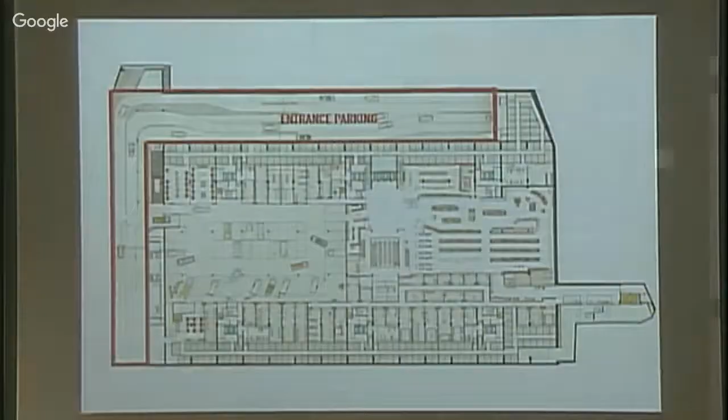Then you have the entrance to the parking garage, the biggest parking garage in town. Again, here, together with the city, we decided to have a big parking garage underneath, which makes it possible for the city to remove parking from the street level. So the city will be nicer because there are fewer cars in the public space. At the same time, the people that are now forced to park in Markthal are also potential consumers.

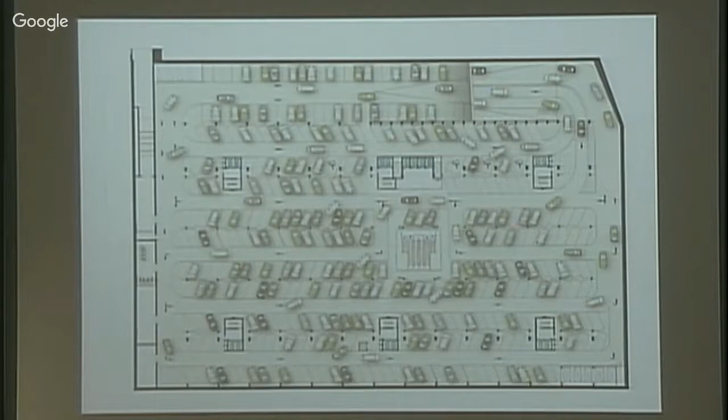So for these people, we made this big crater in the center of the building that goes 4 stories down with escalators, and then you arrive inside and instantly you see this big art piece. You go up, and on your way up, you see the stations in the history of Rotterdam, and you see these shop windows filled with artifacts that we found in the big construction site.

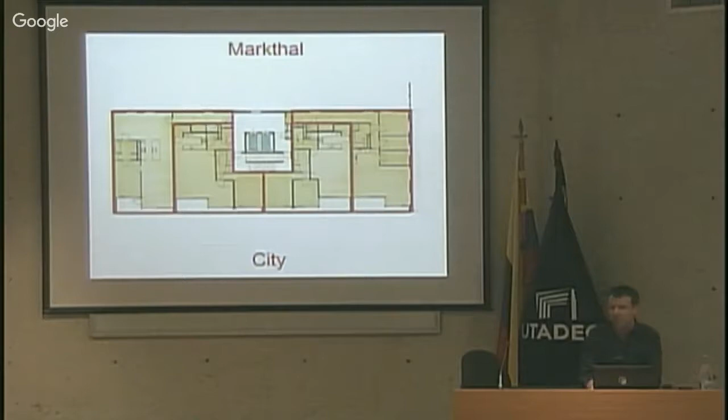Now I'll take you to the apartments. You know the trick was that we basically use the apartments as wall. We have 228 apartments, and they are grouped around 6 cores. Per core, there are around 4 apartments. They all have a view and balcony towards the city, and half of the apartments also has windows to the market. Here you see the outside. This is to the inside.

Yeah, our idea was that you would be able to open these windows, that you lower a bucket to the market, you say, hey, give me a fish, you pull it up again. The problem is that if you would lose the bucket and it would kill somebody, it's not your problem, but it's the problem of the shopping center, because you are then being killed on the grounds of the shopping center, and they would have to pay for it. So we couldn't make the windows operational.

We actually had to use triple glass so that you can't hear the market, that you can't smell the market. But it still works very nice. So these people have a great view. Is it a view or is it a painting that you have there? And they live in these apartments in really strange conditions. This couple has an inverted attic almost. They look down into the market hall.

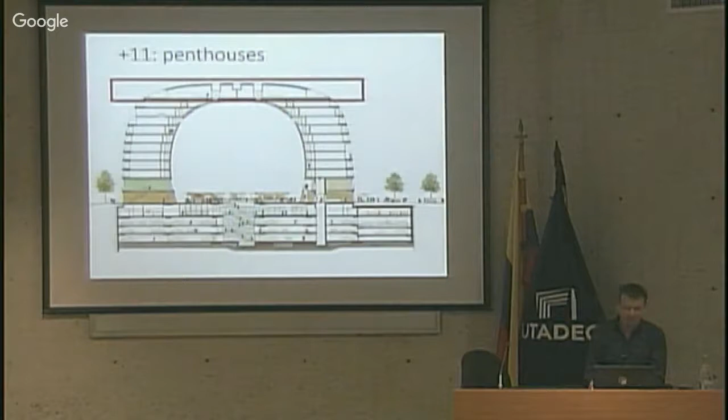On top, then you have the richer people. They have to pay a bit more, the penthouses. They have to take 1 flight of stairs along the window. Here you have Nicole and her dog again. She lives in a very bright apartment. These penthouses are very deep, so we had to add light courts so that the bedrooms have a little bit of natural light. And in the light court, you see that there is a glass window as well onto the market.

Here you see another one. This young couple made the light court into a garden with rabbits, and the rabbits, they walk over the glass all the time. They don't really understand what goes on. This is what happens. Here's 40 meters above the market. And then for PR reasons, we used the baby and some Lego. You remember we have a lot of Lego, and the baby also was not so scared.

So, and this is Markthal in full swing. You see, it started to animate the surroundings already, but it also did a lot to Rotterdam as such. Suddenly we were on television and people said, you have to go to Rotterdam because something's happening there. And Rotterdam used to be a problematic city and people wouldn't really want to go there. And suddenly they projected there would be 400,000 extra visitors.

Oh my word. Then the Financial Times said that we had our own Bilbao. And we thought this is absurd because Bilbao built a really expensive museum and we just built a flat with a market inside. So the amount of money invested in both things was totally different. And also Markthal was a private building, not necessarily a public building as much.